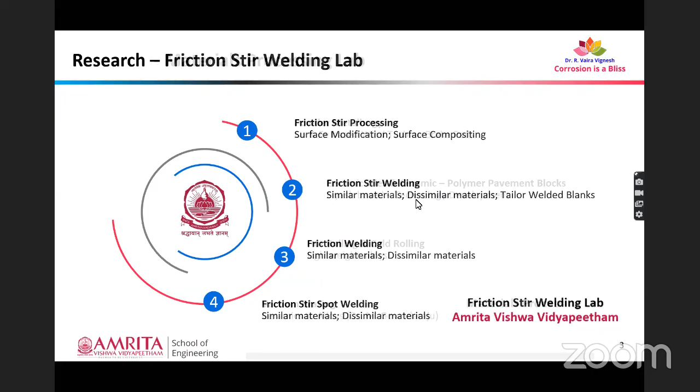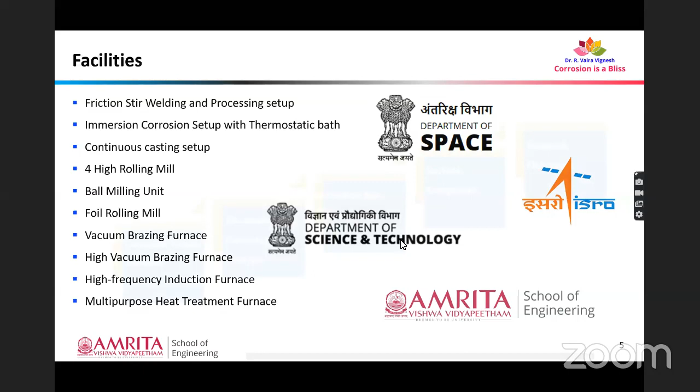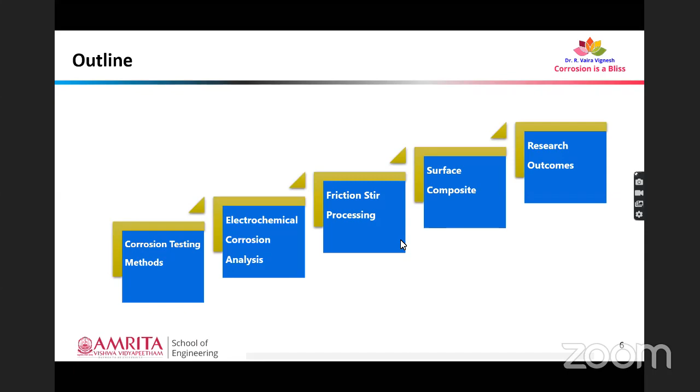Corrosion testing methods. Generally speaking, corrosion is always defined as a deterioration process of a material as it interacts with the environment. But I would like to differ from this definition, because corrosion is a process that helps materials to thrive in their native stable state.

On the right side we could see 3 images where we observe the states of metal ore in the native form, and during the extraction process we supply an enormous amount of heat into it, thereby increasing the activity of the material. In its pure form, the metal's activity is so much higher. Since metals are not ready to be in the native active state, they start to corrode and then come back to their ore state. That process is defined as corrosion.

So when we want to find the secrets of the universe, we obviously have to think in terms of energy, frequency, and vibration, as said by Nikola Tesla. So corrosion is not a deterioration process; it is a process that helps material thrive in their native stable state.

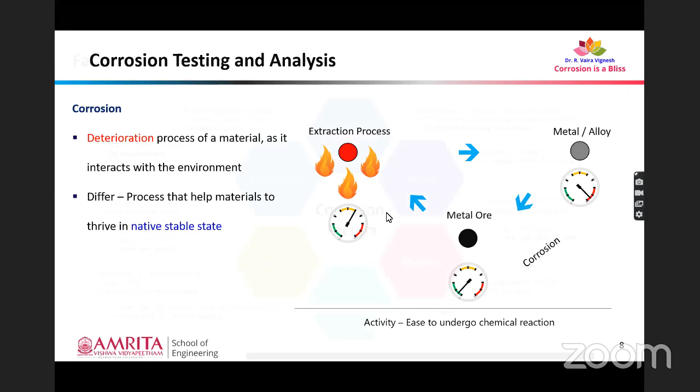Coming towards the physical properties of materials, they too influence corrosion - the physical properties, chemical properties, and metallurgical factors, let's say phase fraction or the dispersion of phases in the matrix, and how they are dispersed, whether homogeneous or heterogeneous, that also influences corrosion.

And coming towards the environment, it influences the corrosion rate of materials to a great extent. For example, local environments, maybe some sort of dust particles present on the metal surface, will also contribute to corrosion through differential aeration methods. And if it is an aqueous medium, let's say water or seawater based or some fluid based, that will also influence the corrosion rate of materials.

Coming towards stresses present in the material, if the material is subjected to stresses in the corrosion environment, that will also enhance the corrosion rate of the materials in most cases.

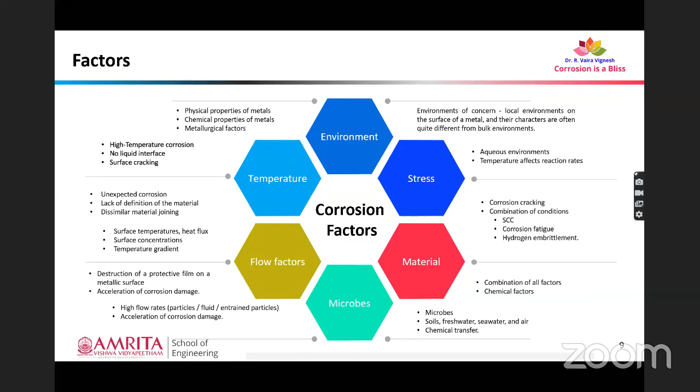The microbes, and flow factors like the flowability of the viscous medium over the surface of the material also cause corrosion to a great extent. So there are many factors that influence the corrosion rate of materials.

So we have many methodologies to test or analyze the corrosion phenomenon taking place in the material. This involves designing, planning, and preparation of corrosion tests for the specimens, including statistical approach and design of experimental approach. Generally, corrosion testing methods rely on simulated service corrosion testing environments or laboratory corrosion testing environments.

In simulated service corrosion testing, we just place the specimen in the respective environment and evaluate the corrosion characteristics of the material. But in laboratory corrosion testing, we do it by mimicking the environment.

For example, if you want to test the material's capability in a marine environment using simulated service corrosion testing, we just take the specimen to the marine area itself, for example a seashore, and do the corrosion testing there. We keep the specimen hanged for few days, months, or years, then analyze the corrosion phenomenon.

But for laboratory based corrosion testing, we create a solution that mimics seawater. For example, 3.5% sodium chloride is always considered as simulated seawater, and that can be used for laboratory corrosion testing methods.

In this, people widely use electrochemical methods, immersion testing methods, autoclave testing methods, and cabinet testing methods, of which immersion testing methods always find a good place in testing methodology. Why? Because in immersion testing, we'll be able to analyze the corrosion products too. That's a great advantage of going with this immersion corrosion testing.

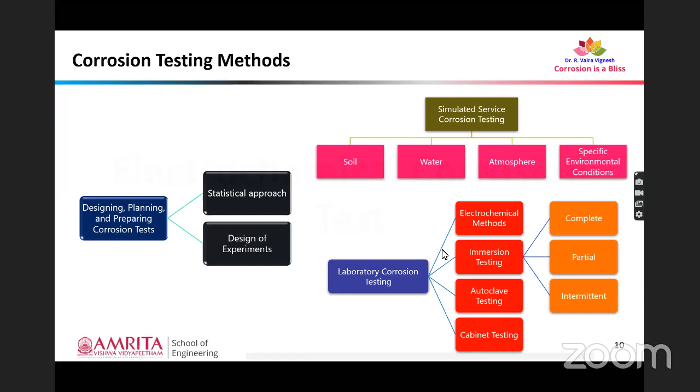So an electrochemical cell, we'll start with basics. An electrochemical cell is one that is formed by connecting two electroconductive metal rods in a solution. That solution is always called an electrolyte because it involves electrochemical reactions.

The electrode which loses electrons is termed an anode, or the region or electrode subjected to oxidation reaction is called an anode. Similarly, the electrode subjected to reduction reaction, where electron gain takes place, is called a cathode.

The liberation of electrons and the flow of current depends on the activity of materials, and based on this activity, elements are arranged in sequence. That sequence is termed the galvanic series.

The galvanic series is prepared by performing experiments with respect to the standard hydrogen electrode. We consider that the standard hydrogen electrode's potential is 0 volt, and based on this we come up with the galvanic series.

So what we do in polarization test is we deliberately change the electrode potential of the specimen from the equilibrium value to the desired value. This is done with respect to more negative and more positive corrosion potential.

For example, in the first instance, we forcibly make the electrode behave as cathode by polarizing the specimen towards more negative potential. After that, we bring back the potential of the specimen towards its current form. Then we forcibly make the electrode behave as an anode by polarizing the specimen towards more positive potential. This is done using a potentiostat in an electrochemical workstation.

This potentiodynamic polarization method will give us data on the existence of limiting current in the material, and it will help us investigate the corrosion mechanism present in the material we have chosen. We can analyze whether the corrosion mechanism takes place through activation-based or concentration-based kinetics.

In activation-based kinetics, the corrosion rate is controlled by the reaction sequence at the metal-electrolyte interface. In concentration kinetics, the reaction rate is controlled by the diffusion in the electrolyte. This happens in weak or aerated salt solutions, while activation-based kinetics takes place preferably in concentrated solutions.

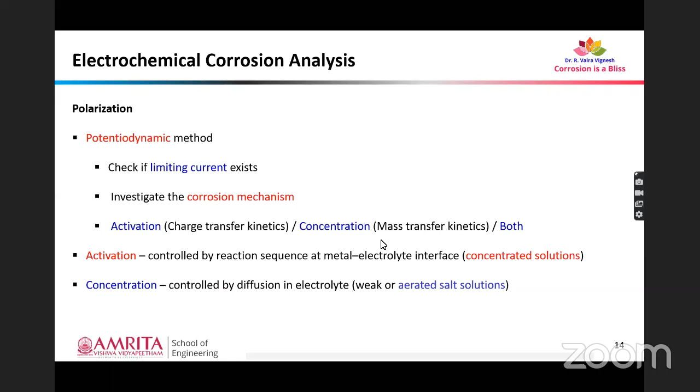Coming to the working methodology of this potentiodynamic polarization method, we take the working electrode and place it inside the container that has the electrolyte solution. If we want to check materials for marine environments, we generally use 3.5% NaCl solution, mimicking the seawater environment.

The reference electrode is used to measure the working electrode potential of the electrochemical cell. It has a constant electrochemical potential as long as no current flows through it. Generally we go with a standard calomel electrode or silver chloride electrode for the reference electrode. The counter electrode is preferentially an inert conductor, like platinum or graphite based.

Coming to the potentiostat, as discussed already, it is equipment that controls the voltage difference between the working electrode, our specimen, and the reference electrode. This is carried out by injecting current into the cell through the counter electrode. The potentiostat then measures the current flow between the working electrode and the counter electrode, from which we can obtain the corrosion current of the material.

So we can say that the controlled variable is the cell potential, and the measured quantity is the cell current. Based on the value of cell current, we can interpolate the corrosion rate of the specimens. Let us take a simple case study where I'll discuss how to calculate the values of corrosion potential and corrosion rate based on this potentiodynamic polarization.

In this case study, we have a specimen as the working electrode, standard calomel electrode as the reference electrode, and platinum wire as the counter electrode. The exposure area is 1 mm square, and the electrolyte solution was simulated seawater, that is 3.5% sodium chloride dissolved in deionized water.

At room temperature. The temperature can be varied; that is also one of the parameters that influence the corrosion rate of materials. Then what we have to do is establish the open circuit potential for 60 minutes, that is, leave the setup for 60 minutes completely.

And we have to measure only the potential coming out of the working electrode, that is, the potential set up between the working electrode and the reference electrode. That is what we have to measure. Once this open circuit potential becomes stabilized, we can go ahead with potentiodynamic polarization scans.

This OCP potential will be used as the reference potential for anodic and cathodic polarization. The specimens will be subjected to polarization at a scan rate of 5 millivolts per second, in the potential range of minus 1.5 volts to minus 0.5 volts. This potential range differs from material to material.

For example, if we take magnesium-based alloys, we have to go for a more negative potential, because magnesium itself has more negative characteristics with respect to cathodic-anodic behavior. This is how the potentiodynamic polarization graph looks like - it will look like a V graph. The blue colored one is zoomed in for our convenience.

This could be done using MATLAB or some readily available software from internet sources. So this was done using MATLAB. What we have to do is take the potential drop region where the current is very, very minimal, and that is our reference potential.

From that reference point, within the range of plus or minus 20 millivolts, we draw slopes to the cathodic and anodic curves. Where these cathodic and anodic curves intercept, that point is going to be our corrosion current, and this intersection point will correspond to a potential, termed the corrosion potential. This process is called extrapolation, because we extrapolate the values to get Icorr and Ecorr.

From this Icorr value, we can identify the corrosion rate of the specimens using the equation: corrosion rate is equal to K into I into E dash, divided by A into rho, where K is a constant representing corrosion rate in mm per year, I is the corrosion current, and E dash is the equivalent weight of the corroding specimen, given by the ratio of molecular weight to the number of electrons involved in the chemical reaction.

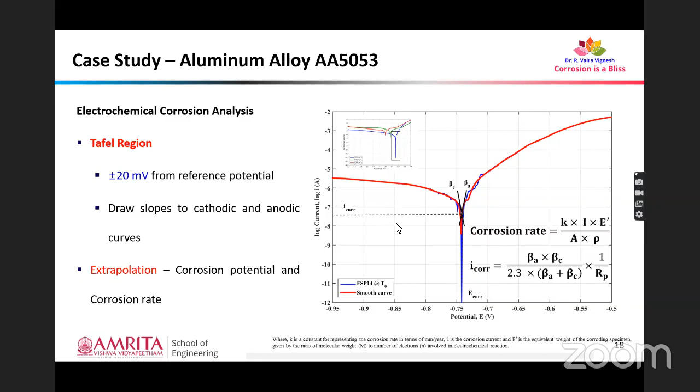So with this, we'll move towards our biodegradable implant concept. This is what I have explained already in our past class, but let me give a refreshing session. Implants are materials engineered to interact with biological systems, and these implants are utilized for hard tissue fractures, to substitute or support the functionalities of the damaged bone. Implant materials may be of polymeric, ceramic, or metallic types.

The problem with polymeric types is their limited biocompatibility. Coming to ceramics, they have limited machinability characteristics. We can go with alumina, silica, zirconia, or hydroxyapatite based ceramic materials for implant fabrication, but they have limited machinability. Coming to metallic materials, conventionally people use stainless steel, chromium, tungsten, titanium, cobalt chromium based alloys. But the problem with these conventional metallic systems is their very high density, compressive yield strength, and Young's modulus compared to human bone.

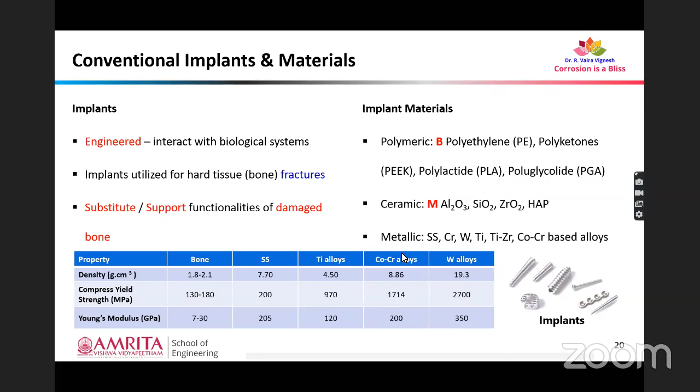For instance, take cobalt chromium alloys. The density of bone is 1.8 gram per cc, but cobalt chromium has a density of around 8.86. The compressive yield strength of bone is around 130 megapascals, and for cobalt chromium it's around 1714 megapascals. The Young's modulus is 6 times higher than that of bone in cobalt chromium alloys. Generally speaking, all conventionally used metallic materials have very high density, compressive strength, and Young's modulus compared to bone.

Why is this not desirable? This undesirably high strength and Young's modulus creates a tendency for the implant material to absorb stresses that are normally transmitted to the specific area of the body. This results in reabsorption of the developing bone material, which deteriorates the bone density. This accretive process of stress absorption and bone density deterioration leads to loosening of the implant and ultimately results in bone refracturing. This process is generally called the stress shielding effect, and it's prevalent in conventional metallic materials.

Added to that, these materials are non-biodegradable in nature, meaning we have to do a secondary revision surgery after the bone heals completely, which has a huge impact on the wellness of the patient. Additionally, the corrosion and wear debris are non-biocompatible, leading to accumulation of toxic ions within the bone region, causing inflammatory osteolysis. We should ensure biocompatible corrosion and wear debris even when the implant is placed inside the human body for an extended period, to avoid inflammatory osteolysis.

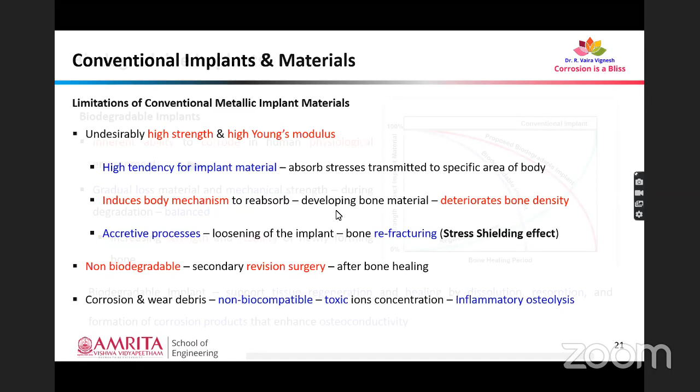If we ensure that the material used for implants has good strength and Young's modulus similar to bone, we can avoid the stress shielding effect. So people have been working on concepts of biodegradable implants for a long time, and the concept is illustrated here. We can see the trend of the regenerating bone gaining strength over a period of time, starting from 0% at the fracture point, and 100% representing its complete recovered state.

So it just takes a long time for recovery. During this course, when we use an implant with conventional material, let's say stainless steel or cobalt chromium or any other materials, that will have high strength with respect to the bone at all times.

So that will result in stress shielding effect to a greater extent. So people started to work on this biodegradable concept. In biodegradable implants, they will have gradual loss in mechanical and material strength during the degradation process that will be balanced by the increasing strength and stability of the newly forming bone. But the problem with the conventionally used biodegradable implant is that they just fail prematurely, and that is also not expected. Because if they fail prematurely, they do not deliver the intended service period.

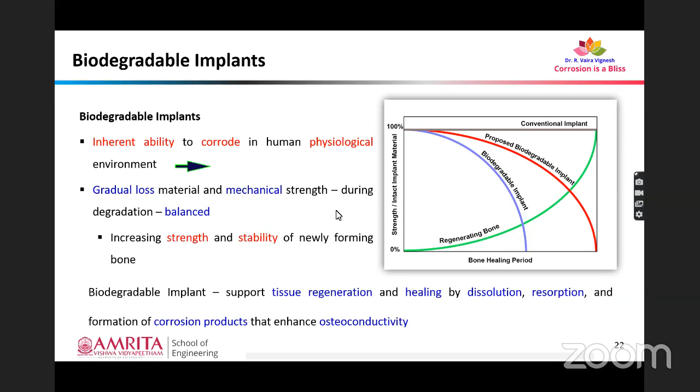So we have to develop a biodegradable implant that has an extended period of time towards bone healing. Added to that, this biodegradable implant should support tissue regeneration and healing by dissolution, resorption, and formation of corrosion products that enhance osteoconductivity. So the key advantages for being a candidate bioimplant material

for magnesium is its density, compressive yield strength, and Young's modulus. Why? Because the density is very similar to that of human cortical bone, the compressive yield strength, which is around 130 to 180 megapascal, and Young's modulus is also very similar. So these parameters make magnesium a key material for bioimplant applications.

Added to that, if we use magnesium alloys, that will result in marginal stress shielding effect compared to any other metallic materials. Added to that, magnesium has an inherent ability to corrode in the human physiological environment, which is rich in chloride ions. And magnesium ion is one of the cofactors of more than 325 enzymatic reactions required for proper functioning of internal organs. Besides, the serum magnesium level is maintained by

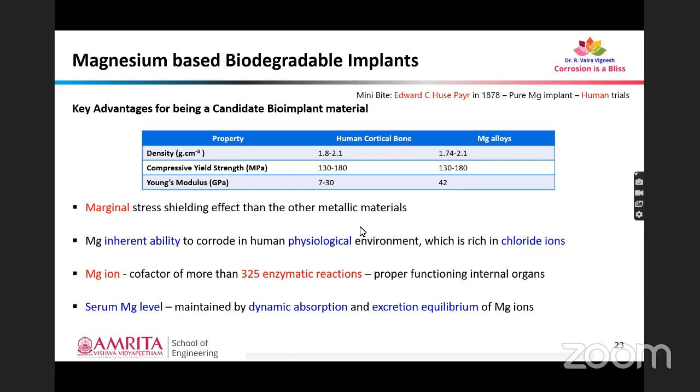dynamic absorption and excretion equilibrium of magnesium ions. So this makes magnesium one of the candidate materials for biodegradable implants. However, there are limitations with magnesium.

First is their HCP structure. The HCP structure limits the workability of magnesium alloys. And magnesium, as we have discussed already, is a highly active metal that results in a high corrosion rate. And the low density of the material results in a high wear rate too.

So in a normal human body environment that is rich in chloride ions and has a pH of 7.2 to 7.4, magnesium corrodes at a rate of 4 to 8 mm per year. If we have such a high corrosion rate, that will result in formation of hydrogen gases in the tissues, and that is a lethal phenomenon.

So we have to do a process or prepare a composite to engineer the corrosion property of magnesium alloy so that we achieve a low corrosion rate. Generally, the recommended corrosion rate for bioimplants is less than 0.5 mm per year. If we are able to achieve this corrosion rate of less than 0.5 mm per year, that could be considered an effective biodegradable implant. I hope we are clear until this concept.

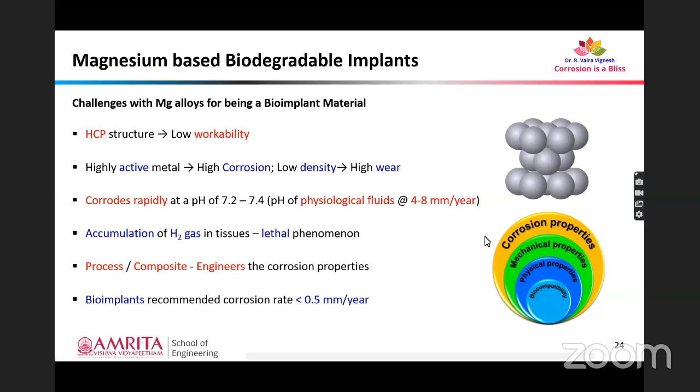Then we have chosen magnesium alloy AZ91 as our base material in this study. There are many studies that have shown the potential use of magnesium alloys such as AZ31, AZ91, LAE442, AM60B, and WE43 towards bioimplant applications.

There are many studies that relate AZ91 with good biocompatibility, and even some animal studies have given good results in terms of implant applications, because this AZ91 has a low in vivo corrosion rate even when it is subjected to implantation studies in animals, let's say guinea pigs and rats. So these things have made magnesium alloy AZ91 a candidate material for biodegradable implant applications.

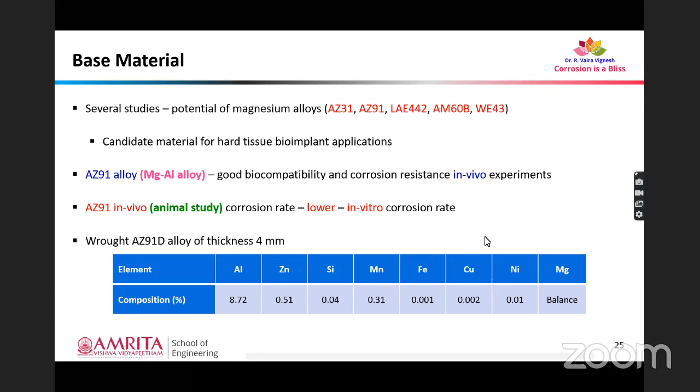So in this study, we have taken wrought alloy AZ91 of thickness 4 mm, whose composition is shown over here, as our base material, and then we have conducted experiments.

So coming to this magnesium alloy AZ91, it has two phases: alpha phase and beta phase. Alpha phase is the primary phase of the alloy, that is alpha magnesium, and beta phase is an intermetallic phase between magnesium and aluminum. So these phases influence all the properties of the material.

For example, if these phases are present in a completely dispersed manner, then we'll have good corrosion resistance. But in case this beta phase is precipitated as a continuous network, we'll end up with a high corrosion rate and intergranular corrosion too. Why? Because this alpha phase is more anodic than the beta phase.

That will result in a high corrosion rate in materials. So generally, when AZ91 is manufactured, we'll end up with a continuous network of beta phase in the matrix material, which has to be engineered to get a proper corrosion rate.

If this beta phase is present as a continuous network, we'll have limited tensile strength and hardness. But if it is completely dispersed as fragments within the matrix, it will improve the tensile strength and hardness of the material.

Coming towards cell adhesion and characteristics such as tribocorrosion, magnesium alloy, since its density is very low, lacks in terms of wear. So it has a high wear rate. If we can make the composite or do a process to enable wear resistance, then it could be considered as an effective implant material too.

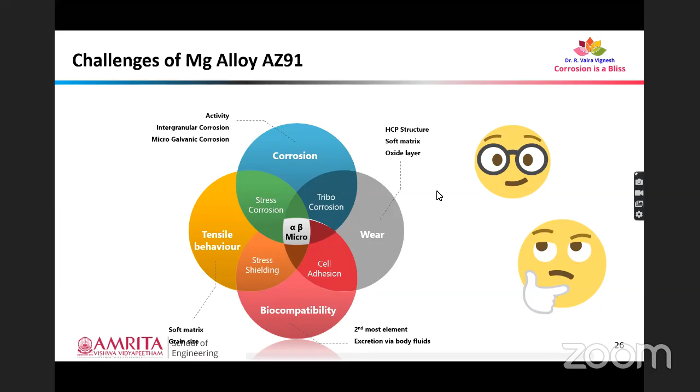So we'll go towards the surface composite that is manufactured using nano phase aluminum oxide. We have used friction stir processing, a solid state processing technique, to fabricate a surface composite of AZ91D and nano phase aluminum oxide.

In this process, we have taken the workpiece, then made a groove of dimension 150 mm by 1 mm by 1 mm, and filled this groove with nano phase alumina particles. Then we have done a sealing pass.

Sealing pass is done with an FSP tool without a pin, and that ensures that the nanophase particles or reinforcements do not come out during the normal friction stir processing process.

This process is enabled by forcing the tool towards the workpiece under an axial load. This is rotated at some rotation speed and traversed on the workpiece. This rotation and traverse cumulatively create the frictional force that results in generation of frictional heat that plasticizes the material, and that plasticized material flows from one part to the other based on the tool rotation.

That gives us effective dispersion in reinforcements too. Added to that, there is mechanical fragmentation of beta phases in the matrix too. We'll see this microstructural evolution during friction stir processing in detail in the upcoming slides.

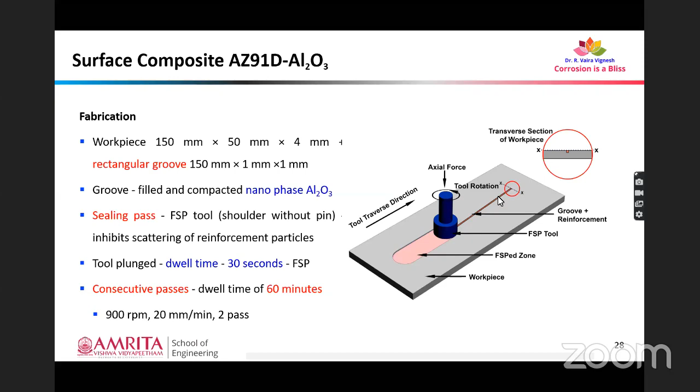This happened because nano phase alumina aids in nucleation of magnesium grains during recrystallization, and this nano phase alumina restricted the growth of recrystallized magnesium grains.

The stirring action of the FSP tool resulted in fragmentation and homogeneous dispersion of beta phase particles. Cumulatively, we have obtained refined grains, fragmented and homogeneously dispersed beta phase, and nano phase alumina in the fabricated surface composite.

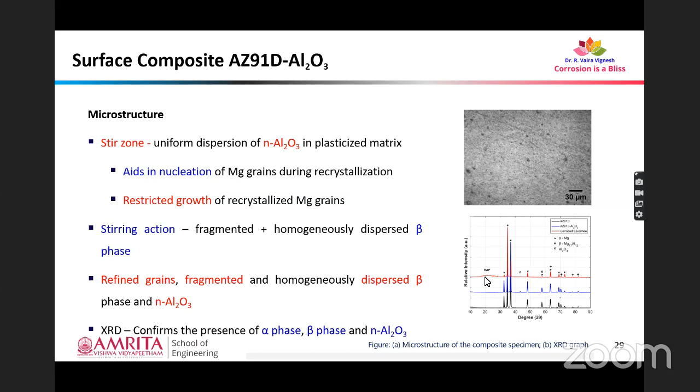Coming towards the microstructural evolution phenomenon that happens in FSP, it is through static and dynamic recovery recrystallization that happens simultaneously in the material. Static recovery happens if the deformed material is subjected to high temperature.

If it is done, there will be annihilation of dislocation structures into stable arrays, and these stable arrays form walls of dislocation. These walls of dislocations are called subgrain boundaries.

These subgrain boundaries act as a hindrance towards dislocation motion, resulting in the formation of subgrains, which obviously improve the hardness and strength of the material too.

Added to that, the second phase particles that we have added influence the low angle boundary, all because of this Zener drag effect.

This presence of second phase particles, that is nano phase alumina, reduces the growth of subgrains and promotes dislocation preservation. Added to that, these second phase particles impede dislocation motion with opposing shear stress, and this is significant if we have particle size of few nanometers.

Since it is nano phase alumina that we have reinforced, as per the results of Humphreys and Hatherly, these particles will impede dislocation motion with opposing shear stress, which means we'll get somewhat better hardness and strength in the fabricated surface composite.

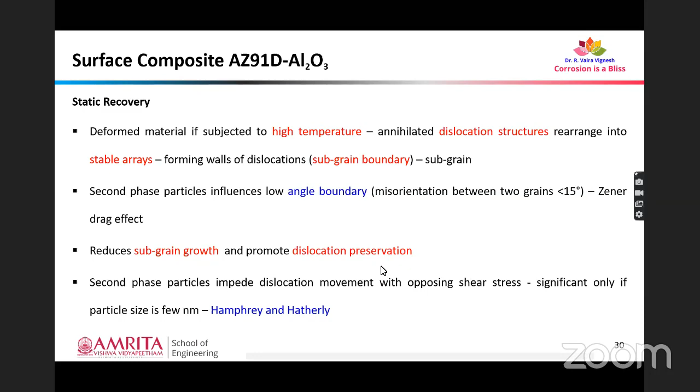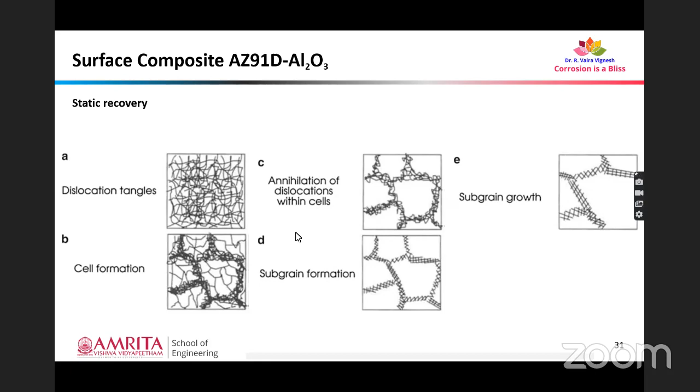If it is subjected to high temperature, there will be formation of cells and annihilation of dislocations within the cells, which will lead to formation of subgrains. And if the temperature is given for an extended period of time, those subgrains will be subjected to growth also. This does not happen in FSP, but it happens in other processes if subjected to external heat treatment after friction stir processing.

So the dislocations in the deformed microstructure, if they reorganize to form a new set of strain-free grains, that is called static recrystallization. We can identify this phenomenon through high angle boundaries. If recrystallization happens, there will be strain-free grains formed from the strained grains. The parent phase, which are strained grains, develop into strain-free grains, which is the product phase.

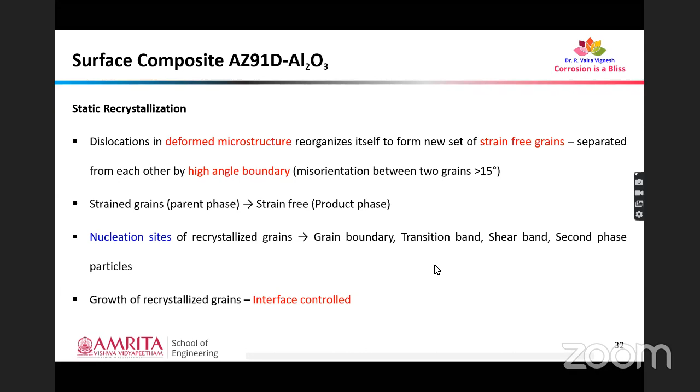The nucleation sites for recrystallized grains include grain boundary, shear band, and second phase particles. The growth of recrystallized grains is interface controlled. Once we have more dispersion of second phase particles, their growth of recrystallized grains will be lesser. Since we have added nanophase alumina into it, we'll end up with restricted growth in recrystallized grains.

If temperature and straining happen simultaneously, the material will be subjected to dynamic recovery and dynamic recrystallization. This dynamic process happens right beneath the FSP tool. So the rearrangement of annihilated dislocation structures into stable arrays occurs during the deformation process itself, while the subgrain structure is typical of the static recovery process.

If we have continued application of strain, that will result in introduction of new dislocations into the recrystallized grains. So they will form subgrains again, and this will inhibit their further growth. This additional straining and formation of new nucleation sites for recrystallization is called series of recrystallization, also called discontinuous dynamic recrystallization phenomenon. This also happens in FSP, and cumulatively adds up strength towards the microstructural evolution during friction stir processing of magnesium.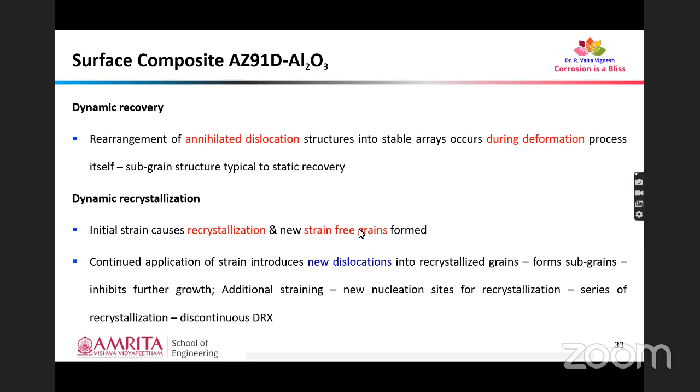To observe the dislocations, high resolution transmission electron microscopy and HRTEM images of the fabricated composite are shown over here. We can obviously see the bright regions as the alpha phase and the dark regions as the beta phase. We have confirmed this through SAED pattern analysis.

We can see the grain boundary and the dislocations present in the material, and we can see the triple point junction in the grains. We can see the subgrains and submicron beta phase particles. So we have confirmed the presence of magnesium and the second phase particles, that is beta magnesium.

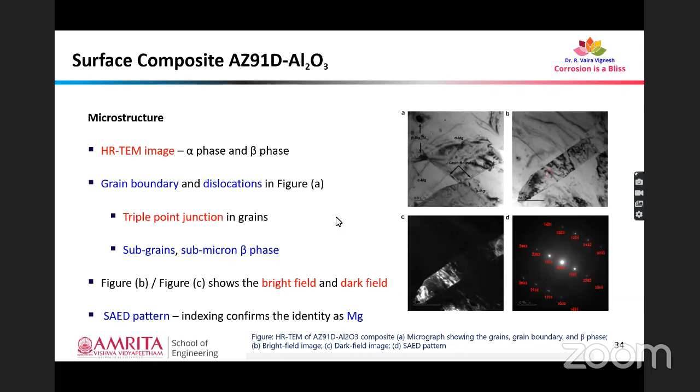Mg17Al12, through the SAED pattern, given as figure D over here. Indexing of that SAED pattern will confirm the material for us. Similarly, we have done analysis over the nanophase particles too, and confirmed the fine dispersion of nanophase alumina and beta phase inside the surface composite.

In figure A, we can see the rings with distinct small spots making up the rings. This is consistent with the d-spacing diffraction data of beta phase. The inset in figure B shows the SAED pattern of that particle. When we indexed that particle's SAED pattern, it was found to be nanophase alumina.

From this we can confirm that there is fine dispersion of beta phase and nanophase alumina inside the matrix, and there is formation of dislocation tangles and subgrains within the microstructure of the material. So we have a refined microstructure, confirming this occlusion of beta phase particles in the surface composites too.

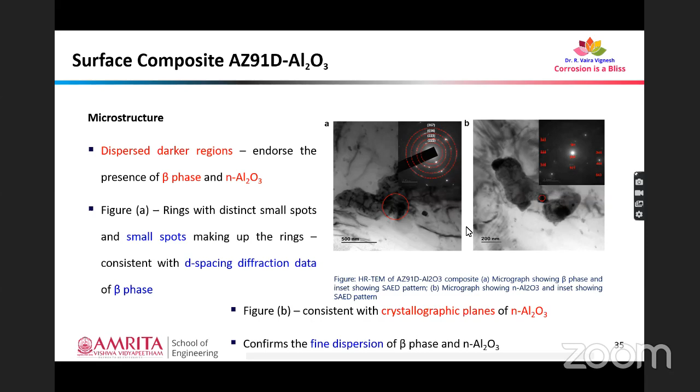Coming towards micro hardness, the base material's micro hardness was around 57.9 HV, taken at a load of 100 gram force, and the stir zone had 62 HV. So approximately there is an 8% increase in the micro hardness of the material. This hardness improvement is attributed to the presence of refined grains, and fragmented, homogeneously dispersed beta phase and nanophase alumina.

Coming towards the peak hardness found in the surface composite, it was around 66.9 HV in the nugget zone. We can see the trend of micro hardness: within the nugget zone, exactly at the middle part, the micro hardness is much higher, reaching around 66.9 HV. In the TMAZ, because of the elongation of grains, the hardness was much more limited. And in the base material zone, it had an average hardness of 57.9 HV.

The hardening mechanism in surface composites can be elaborated based on dispersion strengthening phenomenon. Generally speaking, the interface between the solid phases determines this dispersion strengthening effect in composites or even in alloys.

We have coherent interfaces, coherent with strain, semi-coherent, and incoherent interfaces. A coherent interface is one that has perfect registry of lattices between material A and material B. If there is a small strain with respect to material A and material B, then they are called coherent with strain, so there will be some strain at the interface due to imperfect matching.

The strain energy increases with the size of the growing particle, and there is a transition to a semi-coherent interface. If there are more dislocations coming into the picture, it will be considered a semi-coherent interface, with little matching of the lattices. If there is no perfect match of lattices at all, they are called incoherent interfaces.

Most composites will have incoherent interfaces only. Why? Because we introduce ceramic phases into the metal matrix, and the ceramic phase's lattice will be completely different from that of the metal's lattice point. So generally, composites will have incoherent interfaces, meaning there is no matching of interface at all.

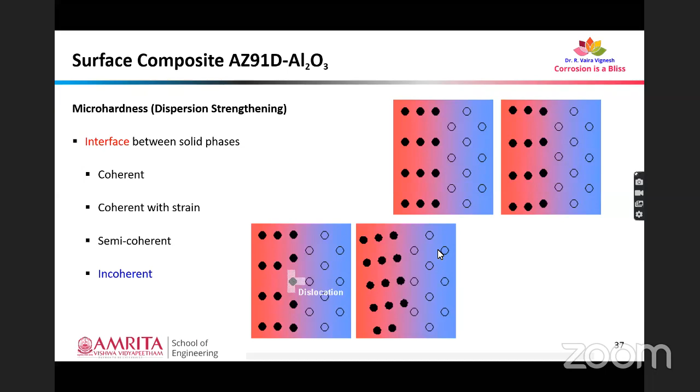So how do we get a strengthening effect? That is explained based on the concept of the Friedel effect and Orowan mechanism. When we have fine dispersion of insoluble hard particles less than 0.1 micrometer, that will increase the elastic limit, perturb the flow pattern of stress deformation, and lead to rapid hardening.

There are many factors that influence the dispersion strengthening of materials: first is size, second is morphology, third is concentration, and fourth is physical characteristics. The dispersion strengthening due to the Friedel effect is very much limited, because only if we have a coherent precipitate will we have a Friedel effect of dispersion strengthening. If we have a big hard incoherent precipitate, that relates to the Orowan mechanism.

In the Orowan mechanism, there will be a dislocation. If a material is subjected to stresses, there will be strain, which induces dislocation. That dislocation continues to bend around the hard incoherent particle, and then moves on, leaving a dislocation ring around the particle. This happens because it is difficult for the dislocation to overcome the phase boundary between the host lattice and the incoherent particle.

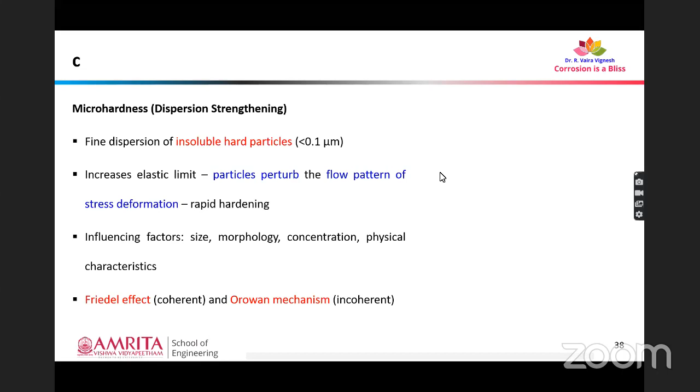That is why we have enhanced hardness in the composites that are reinforced with nano phase reinforcement particles of alumina, which is a ceramic phase.

Coming towards corrosion analysis, first we have done some basic immersion corrosion tests. In this basic immersion test, we have taken the surface composite specimen and immersed it under simulated body fluid.

There are many types of simulated body fluids available in the open market. First is Hank's solution, which people generally use, but we have used Dulbecco's phosphate buffered solution, which is advantageous because it has some stabilizing agents for maintaining the pH.

We made a thermostatic water bath that can maintain temperatures of 37 plus or minus 0.1 degrees Celsius for a period of 7 days, and we monitored the pH with a pH meter with a sensitivity of 0.01. We immersed the specimen into a container containing SBF, and placed that container in the thermostatic water bath at 37 plus or minus 0.1 degrees Celsius, which mimics the human body environment.

After a period of 24 hours, we took the specimen out, dried it, and cleaned it using chromic acid, prepared with 100 grams of chromium oxide in 1000 ml of distilled water. Then we measured the corrosion rate of these specimens. This was done in triplicate at intervals of 24 hours for a period of 168 hours, meaning we repeated the same steps for 7 days.

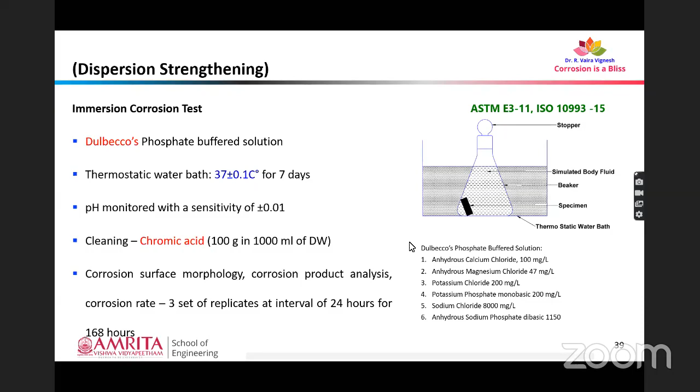Based on our analysis, here is the result of the corrosion rate after 3 days and 7 days of immersion.

So after 3 days, the base material had a corrosion rate of 4.7 mm per year, and the corrosion rate of the composite we fabricated is around 0.337 mm per year. After 7 days, the corrosion rate came down to 1.05 mm per year in the base material, and around 0.287 mm per year in the composite.

When we analyzed the surface morphology, the cracks were many and narrow after 3 days of immersion in the base material, and in the composite they were few and narrow. After 7 days there is obviously propagation and widening of the cracks, and that is all because of the corrosion reaction taking place in the material.

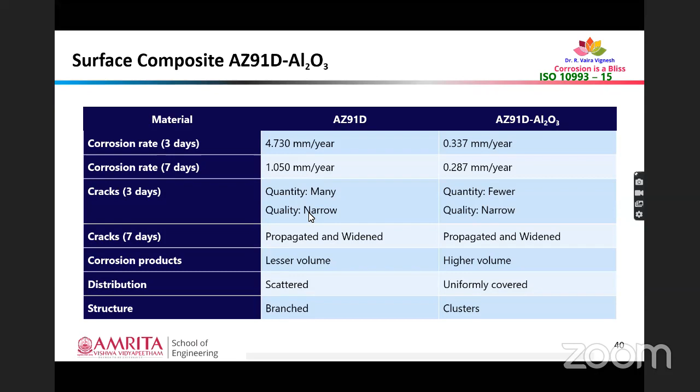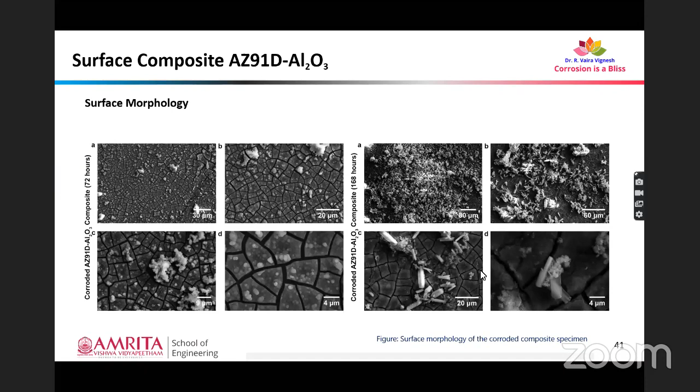Coming towards the distribution of corrosion products, in AZ91D the corrosion product distribution was highly random and scattered. But in the composite, the corrosion product was uniform, meaning there is a complete layer of corrosion product formation. The structure was branched in the base material and clustered in the AZ91D aluminum composite. So here we could see how the corrosion products are distributed and how cracks propagated over 3 days and 7 days in the base material and the composite.

Coming towards analysis, we have done EDS and XRD analysis to confirm the presence of corrosion products and their composition. The initial analysis was EDS analysis. From this we came to the conclusion that the corrosion product consisted of magnesium, aluminum, oxygen, calcium, sodium, chlorine, potassium, and phosphorus. These are the major elements in the corrosion products.

The major parameter when we analyze a material subjected to simulated body fluid is the calcium to phosphorus ratio. Why? Because this ratio gives us an idea about the formation of hydroxyapatite crystals in the corrosion product. If there is formation of calcium hydroxyapatite crystals, that confirms the material will have good biocompatibility, because hydroxyapatite is a very good biocompatible compound—it is the inherent material present in the bone itself.

We have also done elemental mapping analysis, which confirms the overlapping of calcium and phosphorus, indicating the possibility of calcium phosphorus based salt formation. XRD analysis also confirms the presence of hydroxyapatite based crystals—the small peak between 20 to 30 degrees corresponds to HAP. So that was confirmed through XRD analysis too.

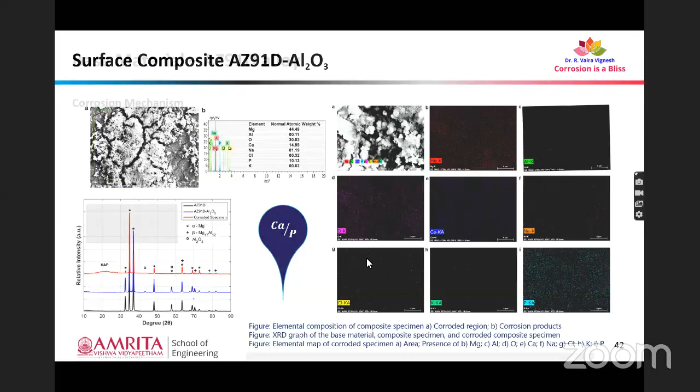So here is the phenomenon taking place in the material. Once we subject a material to simulated body fluid conditions, there will be formation of magnesium oxide or magnesium hydroxide because it is in an aqueous environment. This magnesium hydroxide is highly unstable, so it readily reacts with chloride ions to form magnesium chloride, which has a high dissolution rate within the solution.

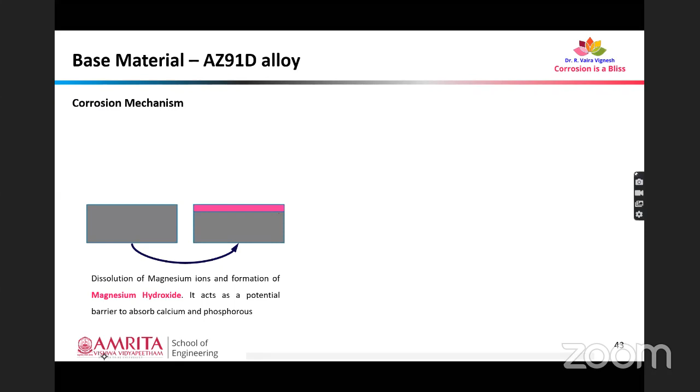So what happens is there will be new exposure of material with respect to time. The dissolution of magnesium ions and formation of magnesium hydroxide is the first step, and it acts as a potential barrier to absorb calcium and phosphorus initially.

But then the formation of magnesium chloride creates more corrosion sites by dissolution, which leads to interaction of calcium and phosphorus present in the simulated body fluid with magnesium to form salts or corrosion products related to calcium and phosphorus. There is more accessibility of magnesium ions to phosphate ions, resulting in the formation of flower-like clusters—these are nothing but calcium magnesium phosphate layer or calcium hydroxyapatite layer. That formation of adherent corrosion product layer decreases the corrosion rate in the material.

So initially we had a high corrosion rate, then there is reduction in corrosion rate, all because of this formation of hydroxyapatite. If there is formation of hydroxyapatite, it is obvious that the material is biocompatible. Since we have brought down the corrosion rate to less than 0.5 mm per year, this is also a good sign for the material to be an effective biodegradable implant.

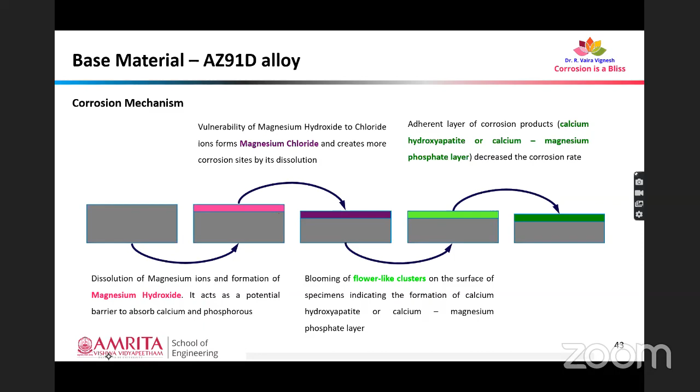Coming towards the electrochemical corrosion analysis, we have done potentiodynamic polarization. The electrolyte used was simulated body fluid based on Dulbecco's phosphate buffered solution. The potentiodynamic polarization plots are shown here—the red colored line indicates the plot of the base material, and the blue colored line shows the plot of the prepared surface composite.

So from this we can observe that the corrosion potential of the base material was more noble than that of the fabricated surface composite. But coming towards the corrosion rate, the specimen with the surface composite had very low corrosion rate than that of the base material. So we have to analyze this thing in detail.

So we have gone for AFM analysis too. And even before that, let me clarify the cathodic and anodic kinetics. The electrochemical corrosion analysis gives us an idea that there is analogous cathodic kinetics, that is, there is minor influence of nanophase alumina particles over the corrosion phenomenon of the material. However, there is unique anodic dissolution characteristics.

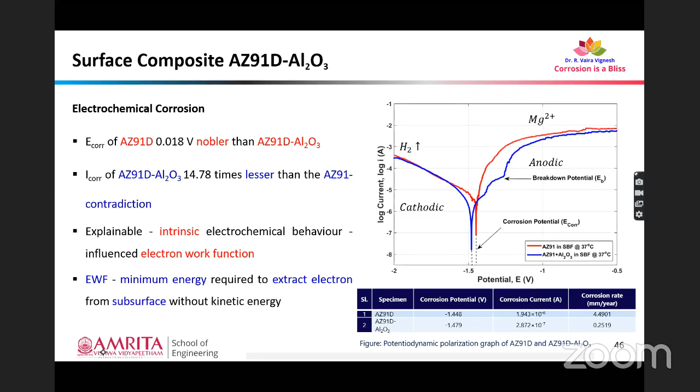So that could be explained on the basis of intrinsic electrochemical behavior of the material, which is influenced by the electron work function. This electron work function is the minimum energy required to extract an electron from the subsurface without kinetic energy. And if we have a material with low electron work function, there is high tendency for the electrons to take part in electrochemical reactions.

But in case of this composite, we have finely dispersed alumina on the surface. This alumina is a ceramic, so it has a very high electron work function, which means that the tendency for the electrons to take part in electrochemical reactions is very low. So this has retarded the anodic dissolution rate of magnesium.

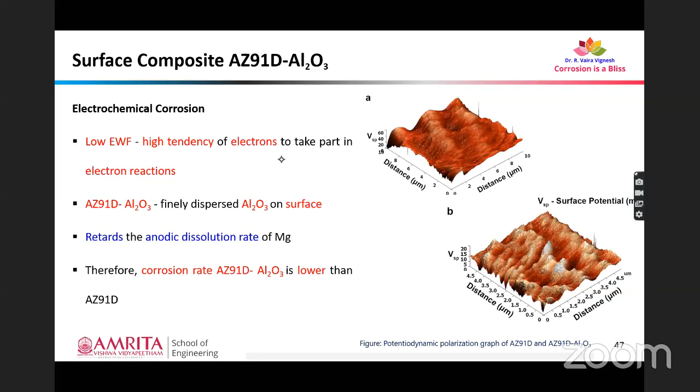And these are the brief outcomes of the research. We have fabricated a composite by dispersing nanophase alumina on the surface of AZ91D by friction stir processing. The nanophase alumina particles nucleated magnesium grains during recrystallization, and restricted the growth of recrystallized magnesium grains, resulting in grain refinement.

Added to that, friction stir processing has fragmented and uniformly dispersed the beta phase. So this cumulative effect and the homogeneous dispersion of particles resulted in high hardness in this stir zone, and the homogeneous dispersion of nanophase alumina, which has high electron work function, increases the corrosion resistance of the material too.

Added to that, the surface composites had an adherent layer of calcium magnesium phosphate or calcium hydroxyapatite in simulated body fluids, which resulted in decreased corrosion rate. Previous studies have also confirmed that if there is formation of such compounds, that will enhance osteoconductivity and support bone growth.

So from this, we can conclude that magnesium alloy reinforced with nanophase alumina is going to be an effective biodegradable implant.